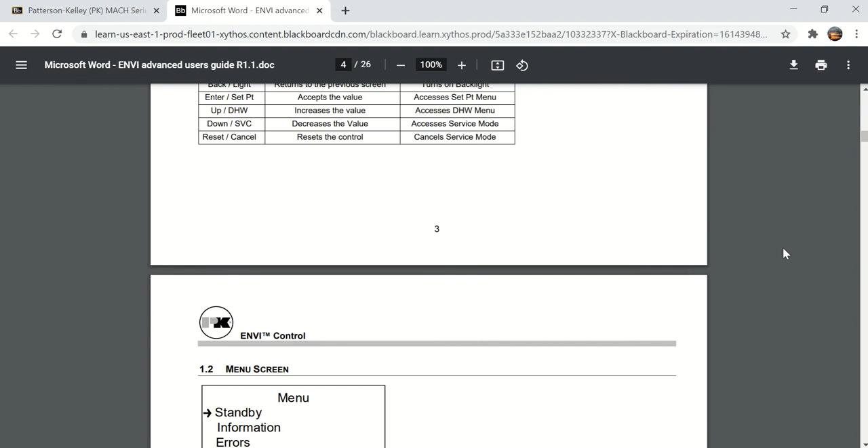On this one, it tells you about the supply temperature sensor, if it is open or shorted, this is the actual temperature indication. The supply temperature sensor will never read below 14 degrees. If it shows 14 degrees, the sensor is open. If it shows a temperature over or right at 244 degrees, the sensor is shorted. That holds true for supply, return, and domestic. The flue gas temperature has a slightly different range from open to shorted.

A sensor failure, you need to recognize that it will read that way. If you disconnect the sensor, obviously you're going to get the lower reading.

The other thing here is the flame signal. It's in microamps, and anything below 1.7 is flame not detected.

And I'd like to be able to show you that. I have trainers in my classroom. If we ever get back to in-person classes, I need to show you how to measure a microamp signal on a flame rod.

This is very important information. If you've never pulled and cleaned a flame rod, that's typically all you really need to do. It's a piece of metal. I can show you how to use a crescent wrench as a flame rod, but that isn't practical, though you can do it. It's just measuring current through the flame, read in microamps, and microamps is 1/1,000,000th of an amp.

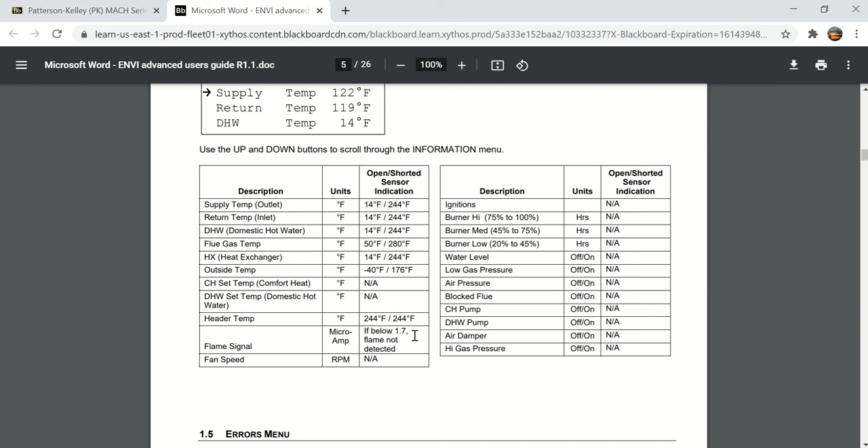So 1.7 microamps is 0.0000017 amps, or 1.7 millionths of an amp. That's not very much current. You will not clamp your little clamp meter around that and get a reading, it doesn't read to that low of a range. So it's important to know how to do that.

But the nice thing about this boiler is that you can actually see the flame signal right on the display. You don't have to get a meter out to do that.

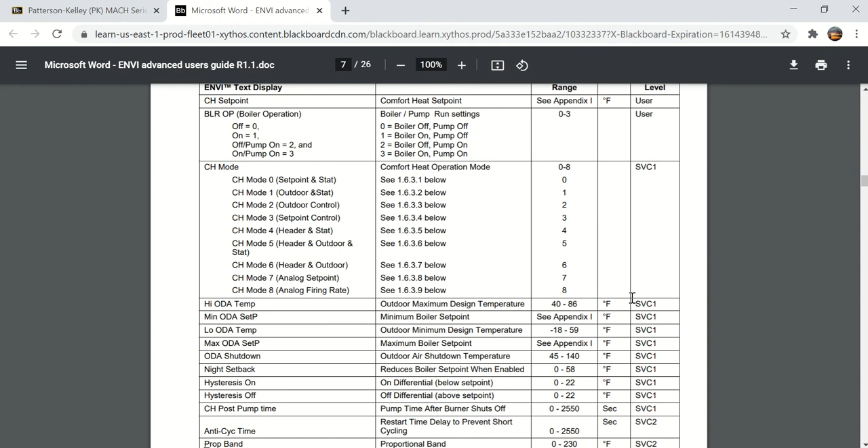There are several different modes depending on whether you're doing set point with the thermostat. You set the boiler to maintain 150 degrees and turn it on and off with the 24 volt thermostat input, or maybe you're using an outdoor sensor control. There's a lot of different options here.

If you have multiple boilers, you'll probably use a header sensor, which is a common header. Or you might use an analog signal to change the set point, or an analog signal to adjust the firing rate. These are all different applications, different ways you can control this boiler.

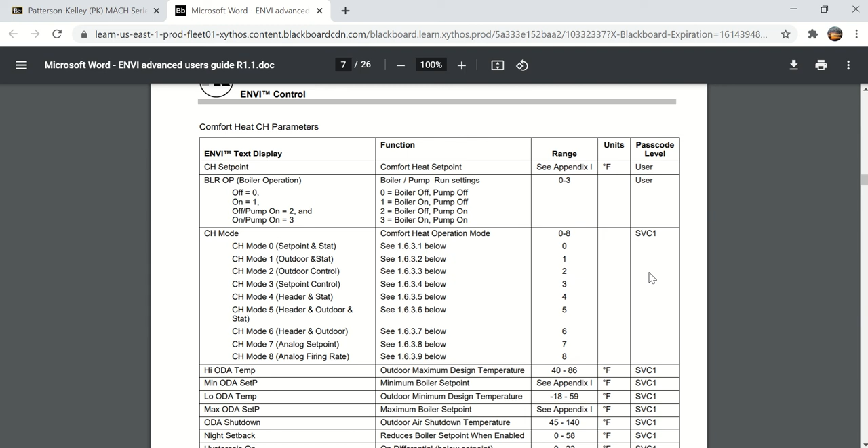It's important to know these features are available, because you may be on a job where they set it up as set point and stat, but really what you need is something like an outdoor control, where the boiler water temperature changes to match the outside temperature—not as hot when it's warm outside, and bring the temperature up on the boiler when it drops outside.

That's called outdoor reset. Here is an internal set point, stop, start—let's say here they're using the set point of 160.

The off hysteresis—hysteresis is another term for differential, just a fancier term I think. So 9 degrees versus 10 degrees: hysteresis to shut off is 9 degrees, hysteresis to come on is 10 degrees.

Set point's 160. So as the boiler temperature drops to 150, the boiler starts, comes up to 160, starts modulating, goes from high fire down to low fire. Now the temperature starts rising above 160, it's at low fire, maybe there's no load, so it finally drifts up to 169, which is 9 degrees above, and at 169 it shuts off.

Boiler temperature drops gradually and comes back on right here. So that's over, say, about a 35-40 minute time period. That's not too bad.

You might wonder, if you wanted to maintain a tighter water temperature, maybe you set the set point at 160 and your on-off differential or hysteresis at 5 degrees, so you only have a 10-degree range. The thing you got to think about is that most boilers, when they start, will raise the water temperature from inlet to outlet about 20 degrees.

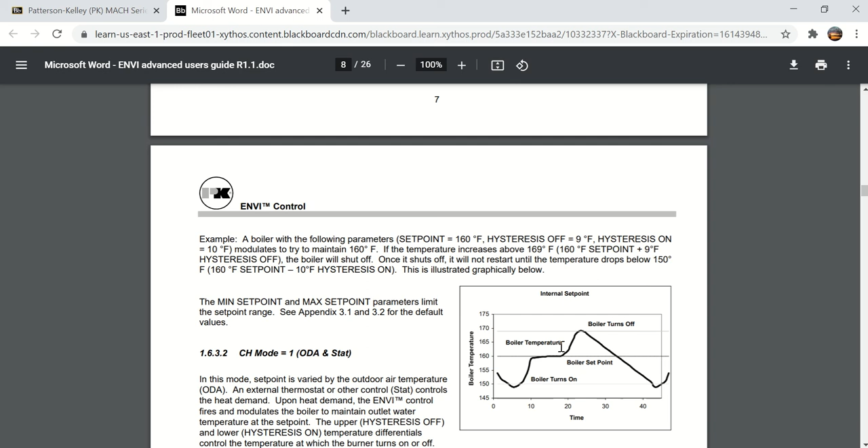Any time you've got a boiler that's stopping and starting more than 6 times an hour, every 10 minutes, you really need to think about how much wear and tear you're putting on the boiler.

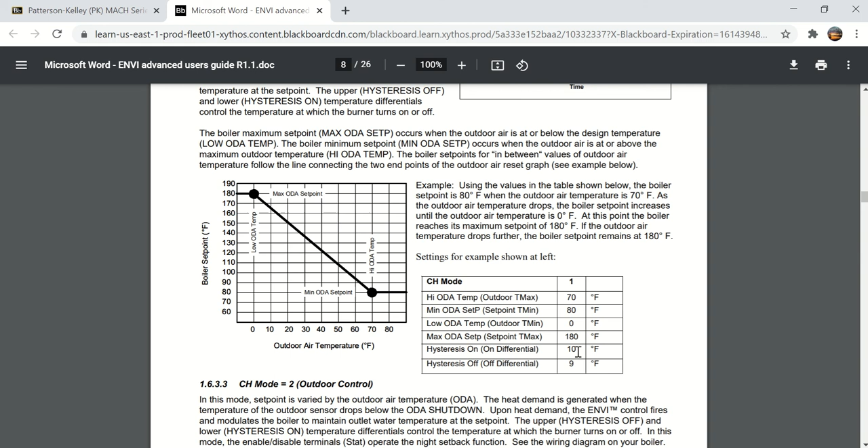Here's the outdoor reset schedule. At 0 degrees outside, we're going to have 180 degree water. As the outdoor temperature goes up, now we're at 70 degrees outside temperature, we're going to have a boiler temperature at 80 degrees. That's called outdoor reset. So if you looked at 30 degrees, you would have about 135 degree water set point. But here's the scale for that: 70 degree outside, 80 degree water temperature; 0 degree outside, 180 degree water temperature; 9 or 10 degree on differential, 9 degree off differential. So that's a common outdoor reset.

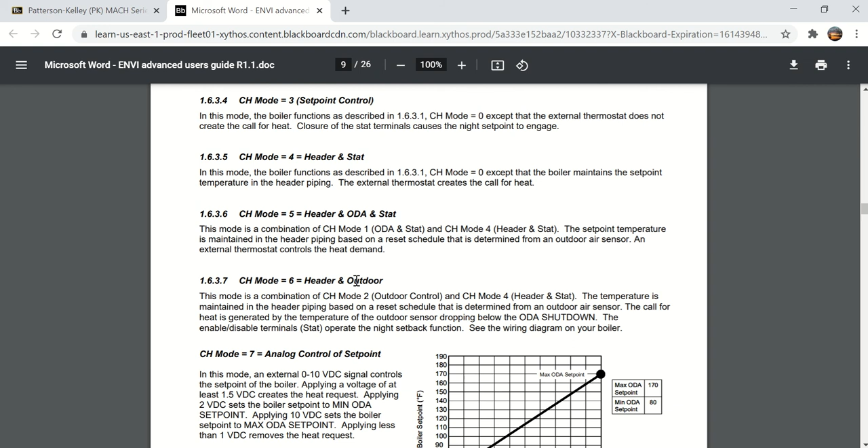And of course, if you're using outdoor reset, you have to pick the right mode, like maybe mode 6, and you have to have an outdoor temperature sensor. It's not optional for that mode. You have to have it.

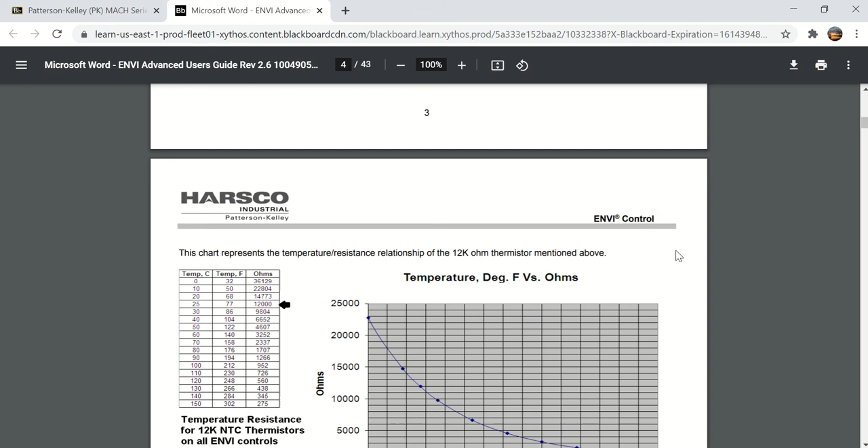Let me go back and look at the 2015. I just want to show you one thing here, because this will be on the quiz. Here's where it talks about the 12K thermistor, 12,000 ohm, and 12,000 ohm is its resistance at 77 degrees. That's why it's called a 12K thermistor.

If you remember on the Bryan and Cleaver Brooks boilers, they typically used a 10K thermistor. It was 10,000 ohms at 77 degrees. Well, PK decided that 12,000 ohm is better for them for no reason other than it probably makes the sensors a little bit harder to buy from anybody other than them. That's their way of keeping their parts.

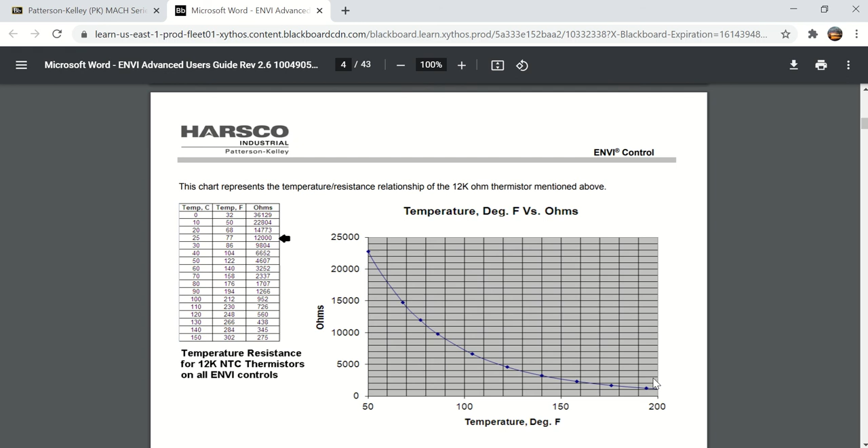But take a look at this curve here. Not all thermistors are linear. If it was linear, it would be a straight line from this point to that point, but it's not. It follows this curve, and the important thing to remember is that it is negative temperature coefficient, NTC, which means that the resistance at the lowest temperature is real high, and as the temperature goes up, the resistance goes down. That is the definition of negative temperature coefficient.

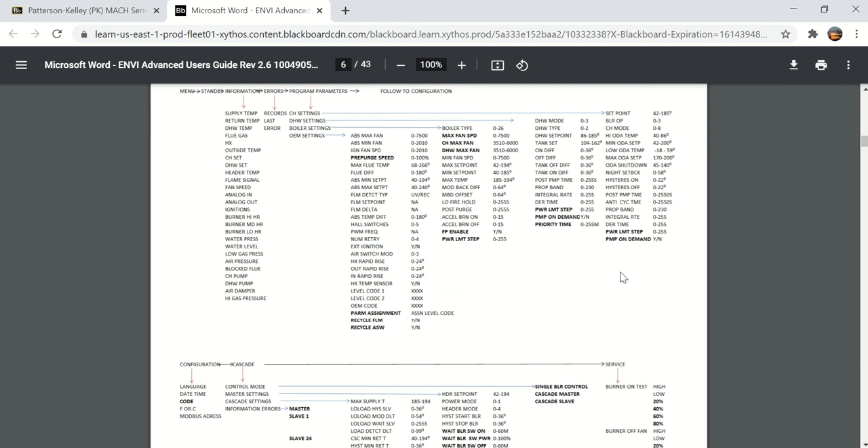All the settings - there are OEM settings that you will not be able to change unless you get the password, or go to PK school when they give you the password for that. But there's a lot of information on the status screens. I do want to get down to here on the status screens.

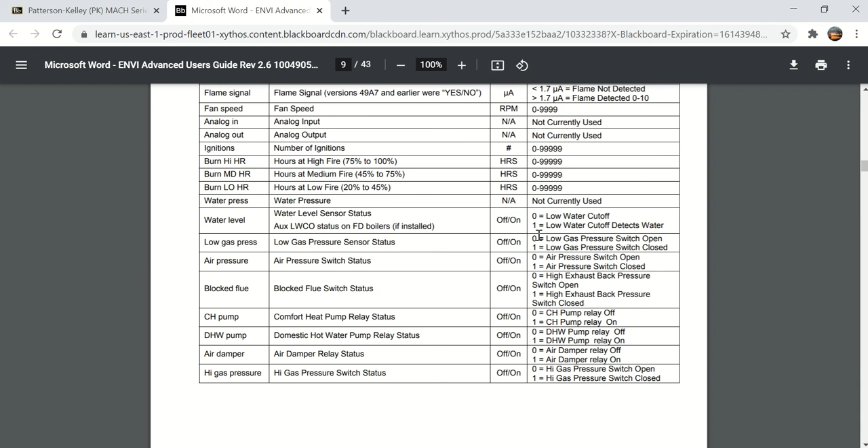You can read the temperatures, but you can also read the status of the low gas pressure switch, either on or off, and the indication is going to be a 0 or a 1. 0 means it's off, 1 means it's on. That's just the way digital things work.

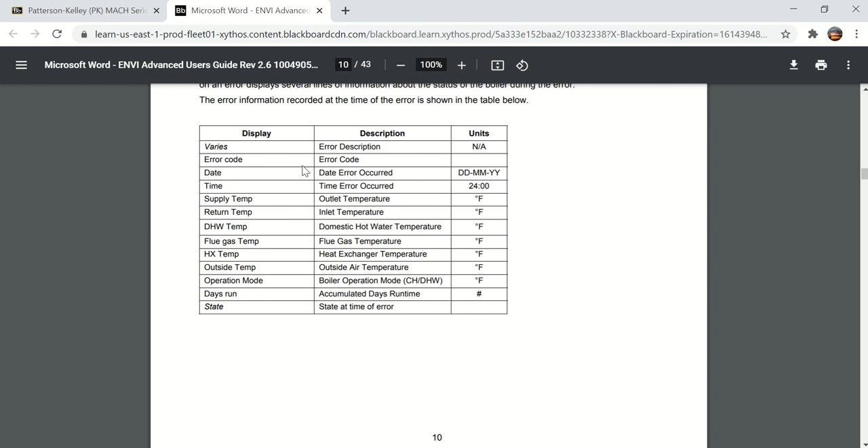Error codes - if you do get an error code on the newer models like the 2015 and up, it'll tell you a little information about when the error occurred, date and time. This is good information for doing troubleshooting, to actually know what the error code was.

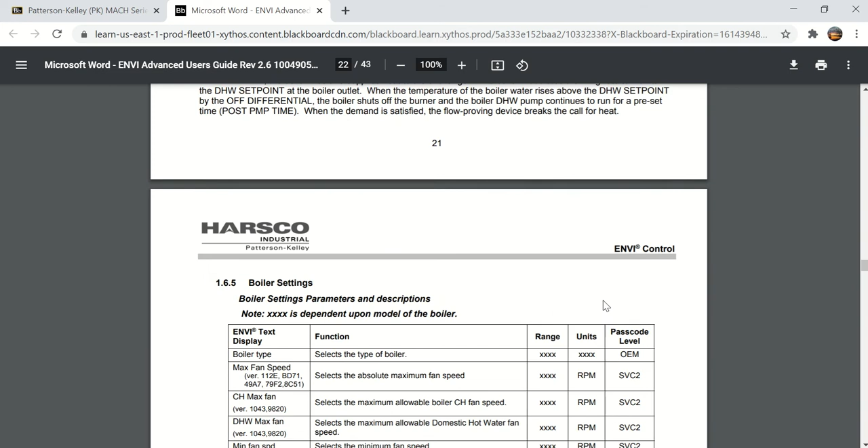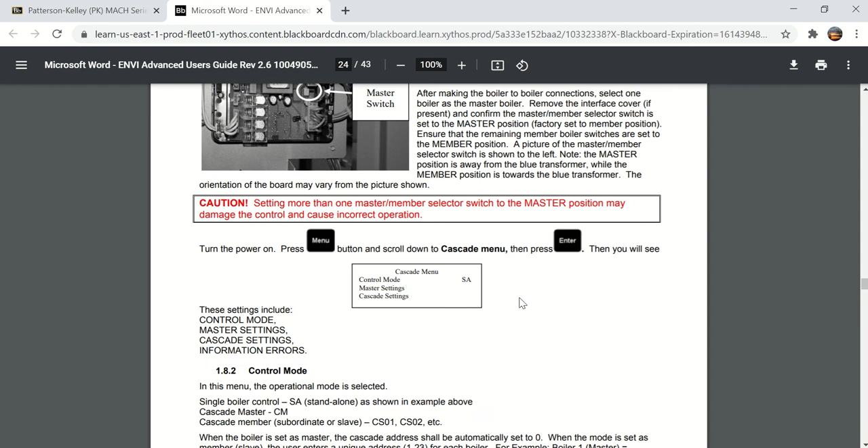We'll scroll way down here. One thing I want to go real quick: if you've got multiple boilers, one of them has to be a master and the rest of them have to be a member, and typically the master is the one that you hook the header sensor to, just in case you ever have to do that.

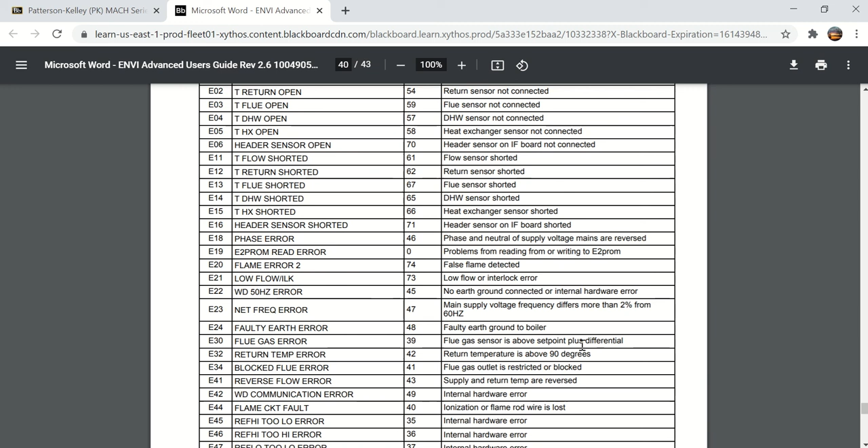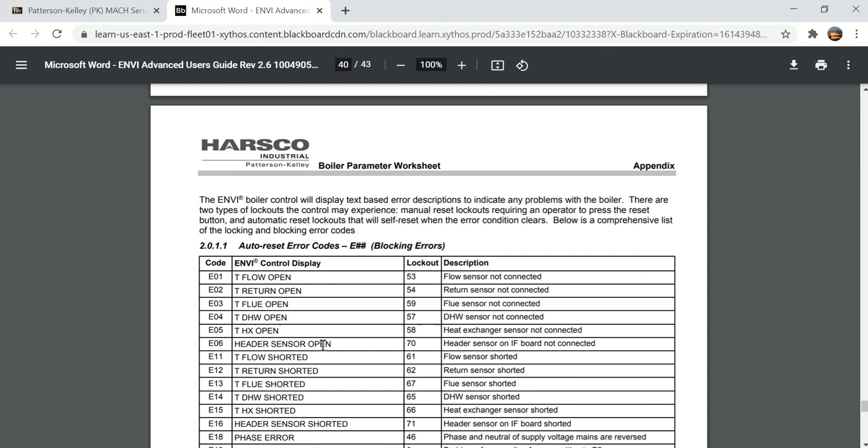So here are some of the errors you might see. This is showing there is no flow. It gives you an error 01. The temperature sensor, return temperature sensor is open. Flue temperature, domestic water temperature, header sensor is open. Different error codes on this page here.

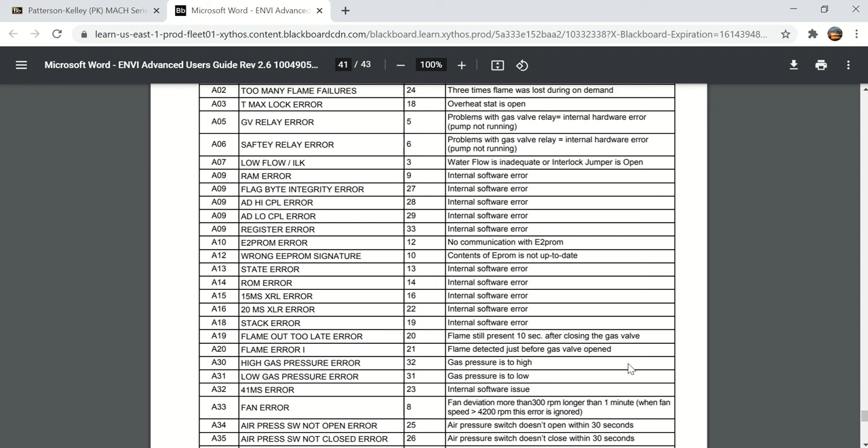Here is a flame error: flame detected just before the gas valve was open. That's probably a bad thing. Flame still present 10 seconds after the valve is closed - another bad thing. You don't want the flame to maintain or stay on after the gas valve closes. That would be a real problem.

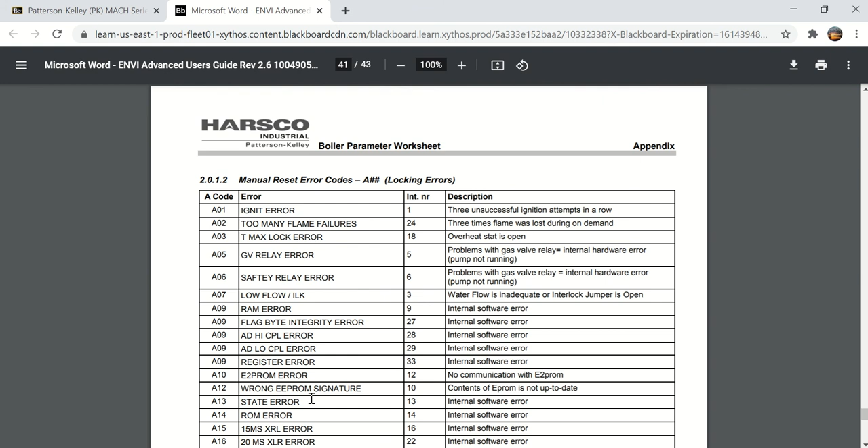Here, the flame circuit error: ionization, flame rod wire lost for more than 15 seconds. All these different things - when you look at an error code, an alarm code, you really want to know exactly what that means. And here's the description for that, kind of things that you really should keep track of.

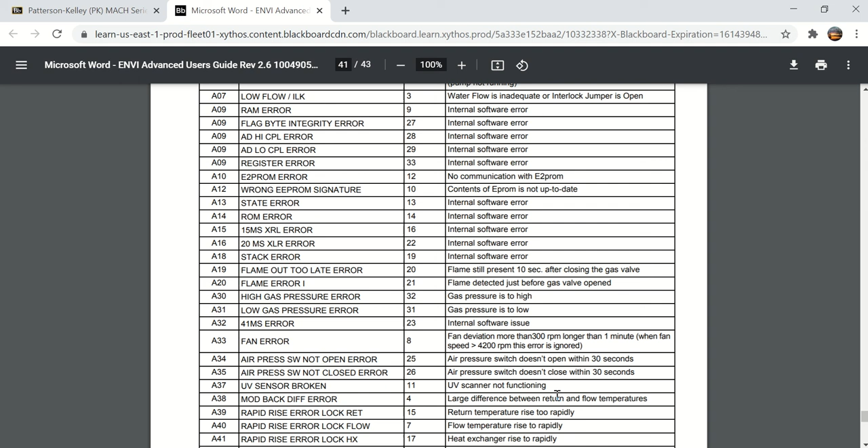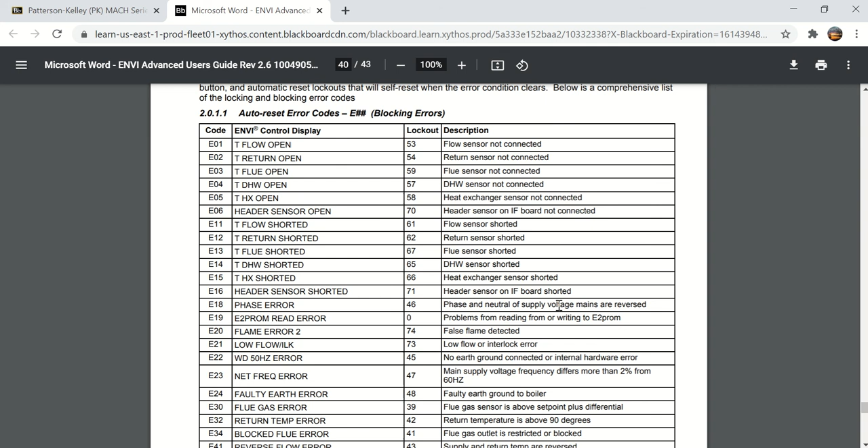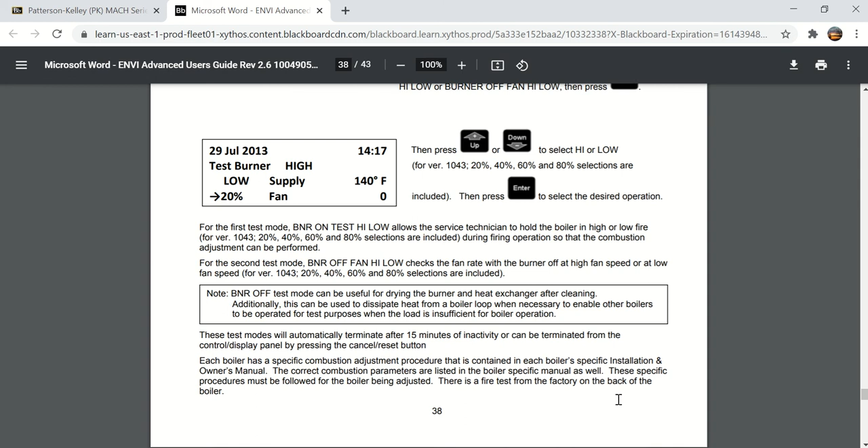If you have a hang tag, anytime that you cause an error - maybe you caused an error by shutting the flame off or pulling the flame rod wire off just to see, to test it - you'll want to put that on your notes on your hang tag that you had a certain error, so that next time around, when the last fault was and why, who was there and what caused it.

So I'll be asking some questions about what you've seen in the ENVI operation manuals on the quiz, just because I think it's important that you know how to use all the literature and all the available information to do troubleshooting on a boiler, now that you've got a little better idea of how the wiring and the controllers operate.